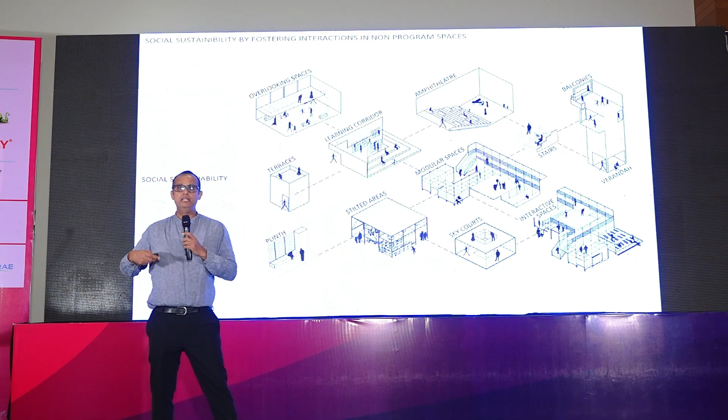So all of this understanding we were trying to build together, but we said that this whole gap, this idea of social sustainability, is so big, and who is going to pay for it? If you tell a client that there is something called social sustainability, he'll say, what does that mean? Let's put a recreational room or something. That's how they would get away with it. But we said, no, actually it is something that has to go through projects, across projects, to build this idea. So how do you actually make it happen in a project?

So you look at a brief, and in any brief that is given to you, about 20-25% would be what we call corridors or non-program spaces, like free-of-FAR spaces. So apart from the client's program spaces, you have non-program spaces. And we said this 25%, which amounts to a lot on big projects, becomes a part of your social sustainability use. So very clearly, any project would have a corridor. But if you turn this corridor into a learning corridor, adjacent to a classroom, it starts working like a corridor that you can use collaboratively.

So we started using every space; lobbies can become interactive spaces rather than serving only as lobbies. So you start taking every space in your building, whether it is a courtyard, a balcony, a terrace, or a deck, and start looking at it as a social space. So that became our endeavor through our practice. And that's how we started our journey actually.

And we were also building across India, and actually the projects I'm going to show you today all came out of competitions. And we consistently do competitions. We are also building different typologies of buildings, because we are building in different climates and different densities, because projects in rural areas are very different from urban areas. The densities are very different, scales of projects are very different. So we were trying to categorize them.

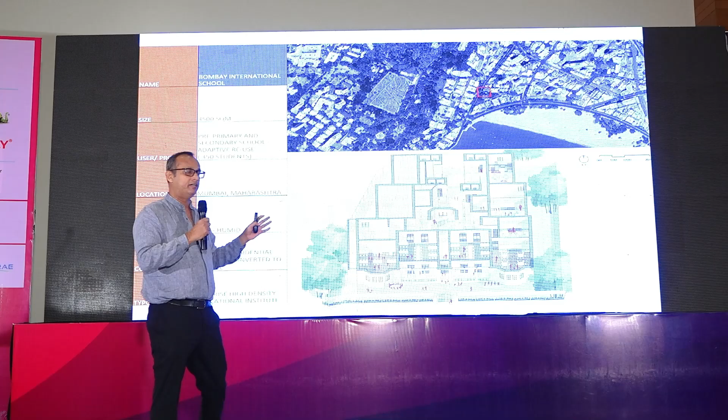So the first project I'm going to discuss today with this thread in mind, the idea of social sustainability, is this small campus. It's actually a retrofit building. And I need to show this because IIID is about interior design. So this is a retrofit and it's about interior design, so I start with this. It's a school called Bombay International School. This school started 50 years ago. There was no concept of international schools at that time.

But a bunch of artists, architects, even many actors came together in Mumbai and said that instead of education, we should focus on citizenship. We need to make good citizens rather than only people who are educated. And that journey took them to this idea of an international school. So it's the first international school in Mumbai, and it started out of a home.

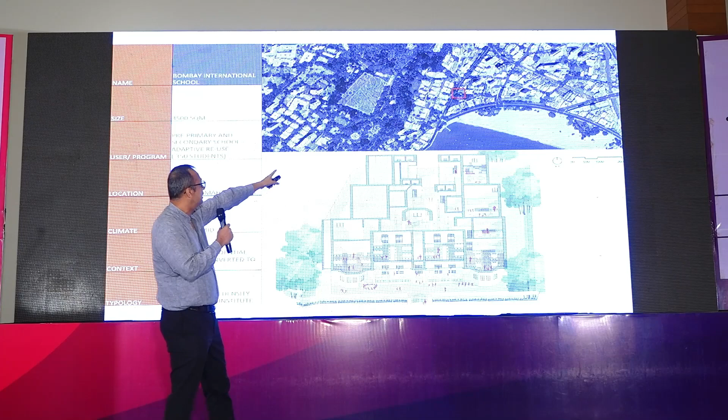It is actually a residential building in Mumbai, if you can see. That's Marine Drive, that's the Queen's Necklace, and that's the site. So it is very much around Marine Drive, and it was a residential building. So the story is that one classroom in the house became the whole house. One house led to the other house. Today they own that building with a few tenants.

Now they are the owners of the building or the school, but they have slowly bought out the entire school. So it's a heritage building that they bought out. So when we were called, it was a competition, and when we went and saw it, some of the spaces were very nicely designed, but every space was very differently designed. So we tried to find out, these spaces are nicely designed. They said yes, they're all designed by architects, but they are all different architects. So we said, how did this happen?

So the story goes that this is a parent-run cooperative school. That means the parents have to actually do service in the school. The parents run everything except educating. They don't teach. They run the food mess, they run everything. The mothers cook there, it's a lot of service. So the architects who are parents design the spaces. One architect has designed one space. So we said, oh, now we get the picture. Why do you want us? No, we want one architect to design everything now. Okay, so the competition starts.

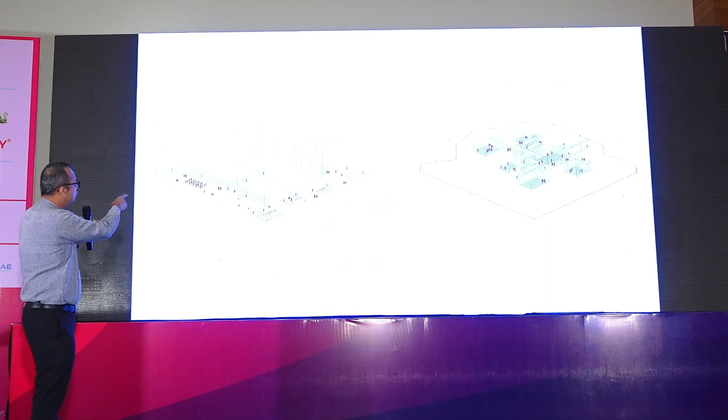So we started analyzing this building. And like I said, what was social about it? We were looking at the map of social footprint. It's a parent-run school. That's the parents outside, because they're always outside. There's no space for them inside the school. And we said, how do we increase the social footprint for parents as well as students? So that is the start of the concept. And then we started looking at spaces.

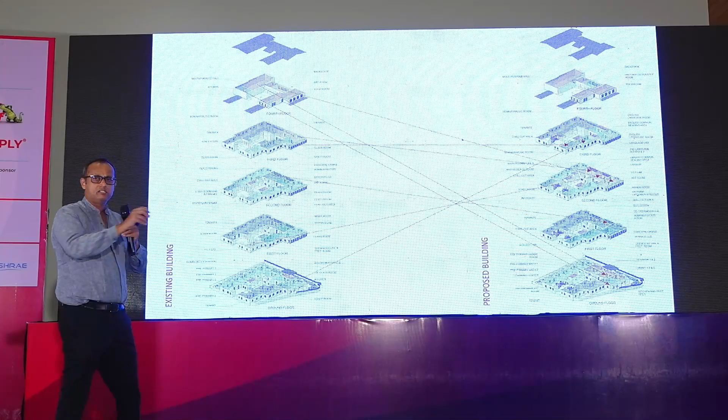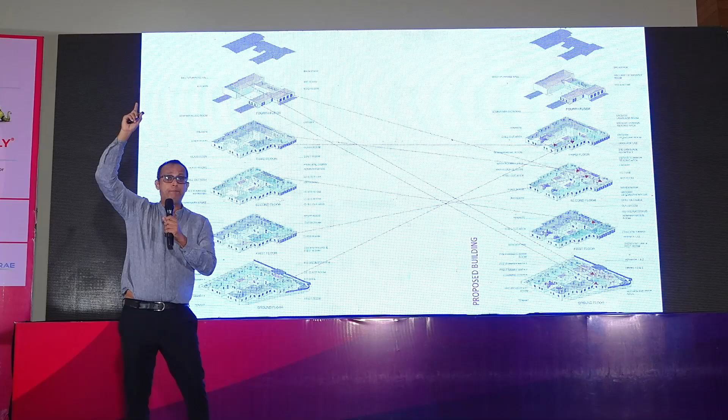All the spaces were very, very badly organized. I'll give you one instance. They have a kitchen on the ground floor, and the food is taken to the third floor. They don't have an elevator. The dal goes for 300 kids up the stairs. So this is double jeopardy. If the dal falls, the kids will get hurt, staff will get hurt. So we said, let's fix these problems. So we started fixing all these problems. And there comes the plan.

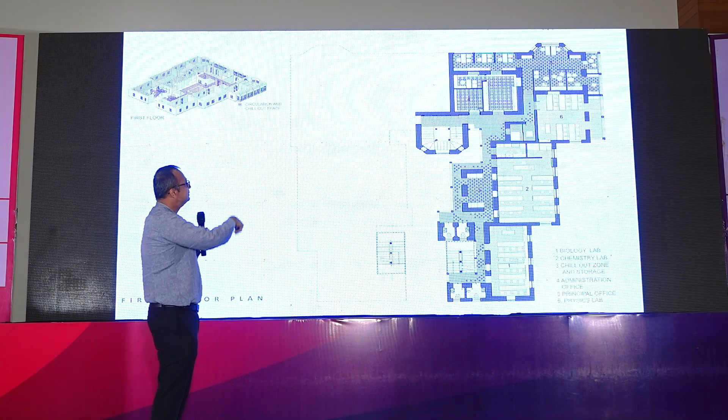And the pre-primary is here. This part of the building is owned by somebody else right now, but of course it's already taken over. Here you can see that the labs are here. So conceptually we said that instead of having classrooms, let's call them subject rooms. That means you can create immersive environments. A teacher doesn't have to go class to class, but the students go from class to class. So you give a geography person a chance to create an environment of geography or history. So the classrooms become immersive subject rooms rather than classrooms.

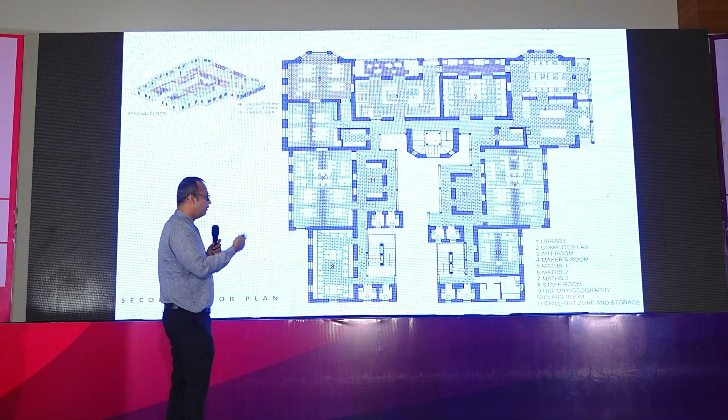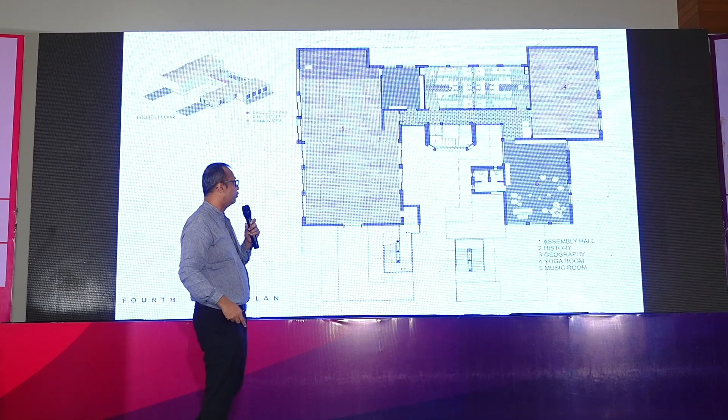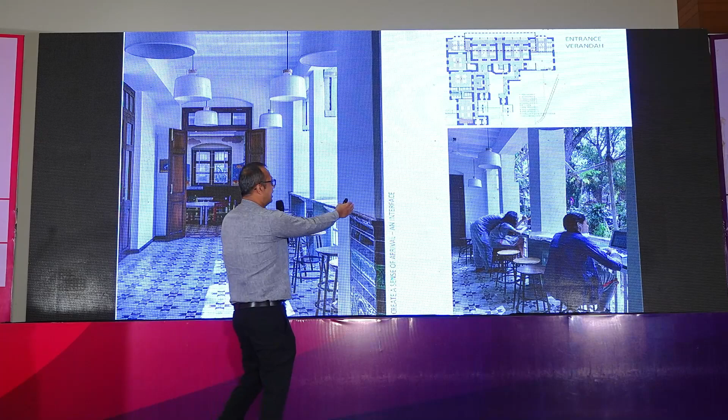And that's after we finished the project. In Mumbai, space is a constraint. So these verandas on the ground floor were taken up by the school. And we said we have to open it up, because actually the veranda is the air conditioner of a building. It allows the western sun to shade. It allows the building to breathe. So we opened it up, and now we see students using those spaces very positively, rather than just putting glass on the outside. So this is that dining area on the lower floor, where parents also use it for their meetings. The parents are very happy.

Otherwise, they were outside that veranda sitting, you know. So you can see jack arches in this building. So we did very little actually. We just had to clean up the old flooring. The floorings that were damaged, we had to create a new pattern. And we had to simply design lighting actually.

That was the biggest challenge. Otherwise, everything was keeping the wood the way it was. I mean, sometimes the architect's role is very simple. You don't have to do much. And that's what you realize, you know.

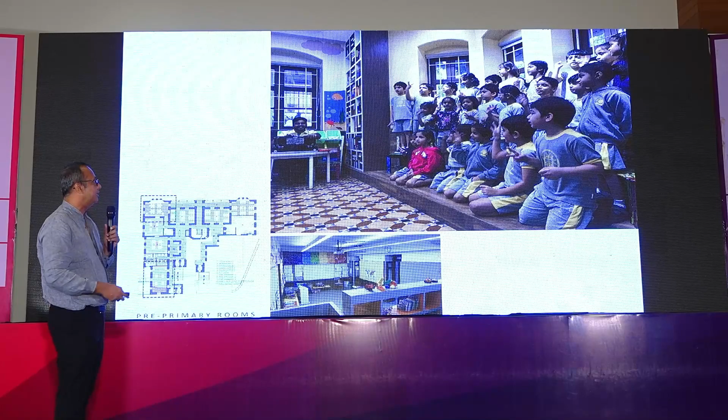So this is the pre-primary section, which is the language and drama room for them. So we created a small stage, you know, for them at their scale. And that's how they use it; you can see them singing all on that one little stage.

And this is one of their reading and play areas. So we created a play area where they actually can go and discover a book. They find their book. I don't think we'll fit into it, but those kids really go up and find their book and they find a place to sit and read also.

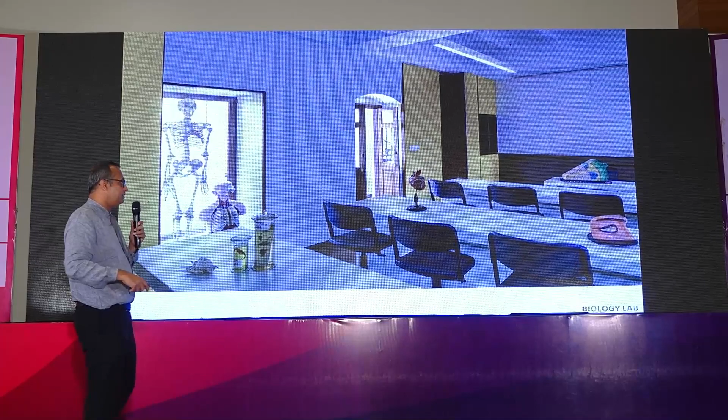So this is the biology space, and even the skeleton, we realized, had a name. So we said, let's put this skeleton in the window, because everybody knew his name. We didn't know. The skeleton had a name. So we just put him in the window of the corridor so everybody can see him. And that's the art space. We said, okay, it should have more lights. So on the corner,

And just to give you an idea, our earlier CM, now the deputy CM, could not get his kids into this school. So it's that elite school, and that's only because he can't give time to do service. That's why. There's no other reason he could not get his kids in.

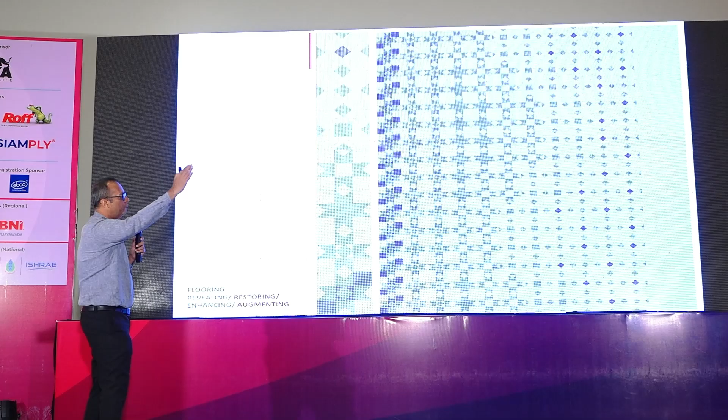And the challenge was there were 19 types of flooring because it was a residential building, right? So we had to create a pattern of our own. So we extrapolated out of the geometry a pattern that evolved into the flooring across the entire space. So from the window side, you have a lighter flooring that comes in the center and becomes darker, so that when the space brings in light, it bounces off and you get more light in the space.

So evolving the flooring was an extensive process. It's looking very seamless here, but I kid you not, in the office it was a very extensive process of geometry and iterations, and I don't think we used any AI 5 years ago to make this happen. Kids were doing it by drafting, so it was not AI.

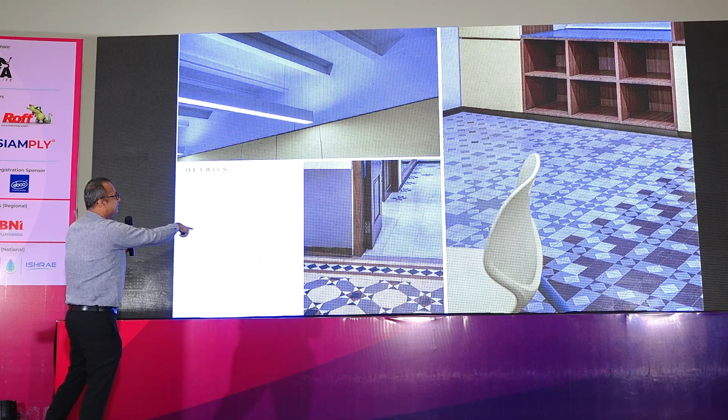So those are the details that you see, the old flooring with our new floorings there and there. And simply, you can see the joists over there, and the light that we've designed is a simple bar. Actually, there's nothing we've done. Just suspend the bar, and the light is thrown to the roof to show the roof, as well as give light to the tables.

But actually, on the contrary, what happened was the brief. It was a design competition, where in the first stage, when we read the brief, we started modeling it, and we started realizing that 500,000 square feet on 7 acres was very tough. Some of our buildings were going to 8 and 10 floors. So we said, this is a lot of height for an urban campus, a residential campus. So we should bring it down.

So when we looked closely at the brief, we saw that all the student residential rooms were all single rooms. When we studied architecture, when you leave home, we stayed in twin rooms with our friends, and we made a new family, right? And we said, this is the idea of how you bring the social milieu, where you make new friends, but you need a room partner.

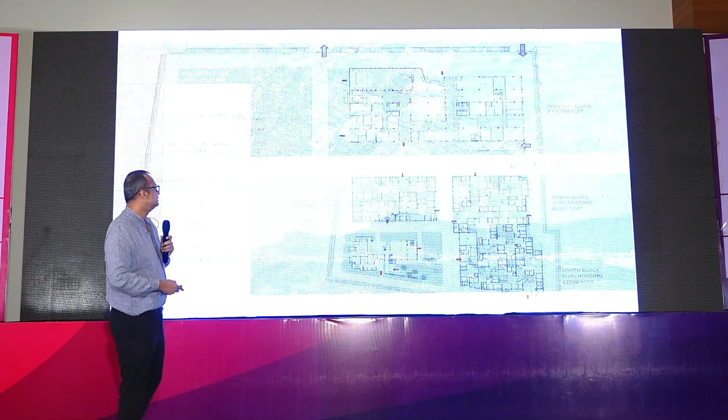If you visit the deep plan building on top, there is the institute. And when you are building at 2 FAR, it is not very easy. If you want to build tall, it is easy. But if you want to build low, it is very tough, because you want light and ventilation in every small room. So there were strategies. In a deep plan building like the institute, we were doing large pockets of light, like a Swiss cheese box with spaces that give you ventilation from the top and the side.

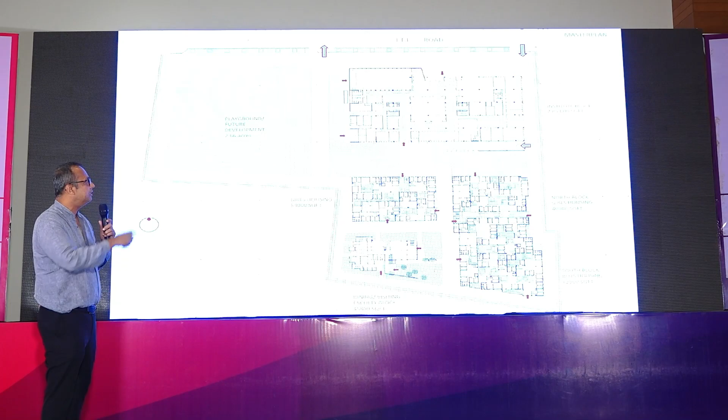Similar ideas for the residential, which is this L-shaped building. Two separate buildings. That's the girls, this is the boys. I think that has changed because the girl percentages have gone up in the school. And that's the dining hall down there with the visiting faculty room. So that's the plan, and we wanted to leave the playground free. Initially they didn't have the land, and we still wanted to respect that. So that's the master plan, I would say, of the 500,000 square feet.

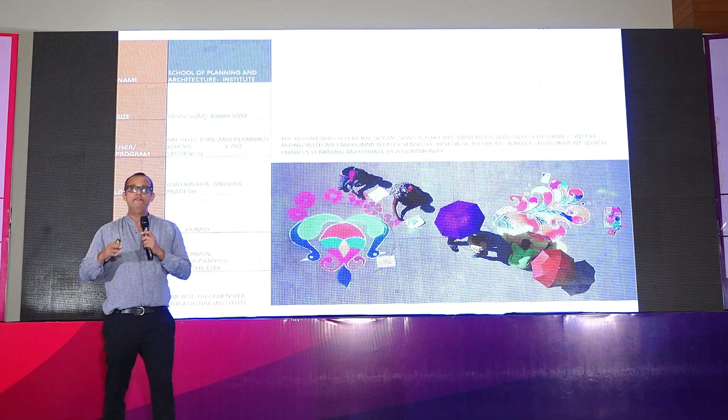This is a picture that we chanced upon, and I thought this is very relevant to us. The intent was to create social spaces that are embedded within the cultural context, along with an environmentally sensitive response, to create a built environment which enables learning and living as a community. And I think this is very important, that if you cannot express yourself in a campus, it becomes very restricting.

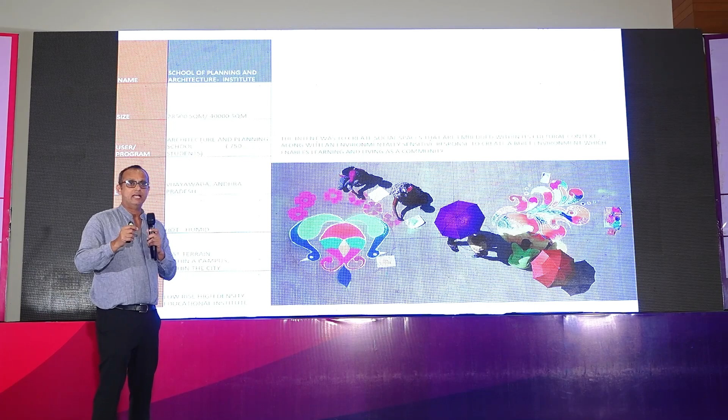So what was actually interesting about this is that you see children doing rangoli, but the most important thing is the shadows of the umbrella. That means even if it is very hot, which you know Vijayawada is what we call Blazivada, still the umbrella works. So we said, this idea of umbrella is fantastic. So when we were looking at the institute block, we said it's a massive building. We'll put a massive umbrella like a parasol on top of it and start.

And then we said, why can't the building itself become a parasol? So we took up 2 floors of the building and made it into the parasol that gives you shade. Then we added structure and textures, and porosity to the building.

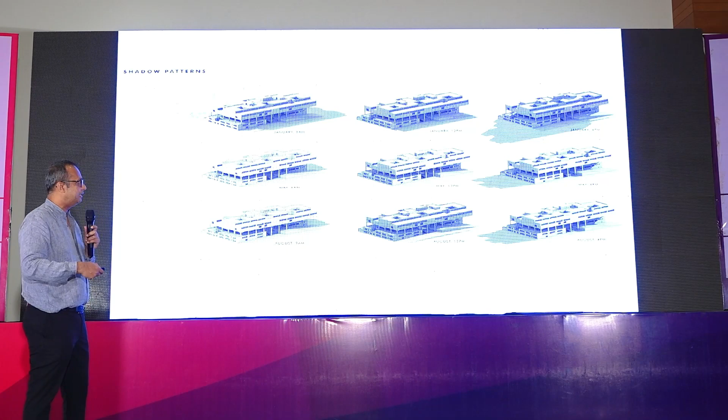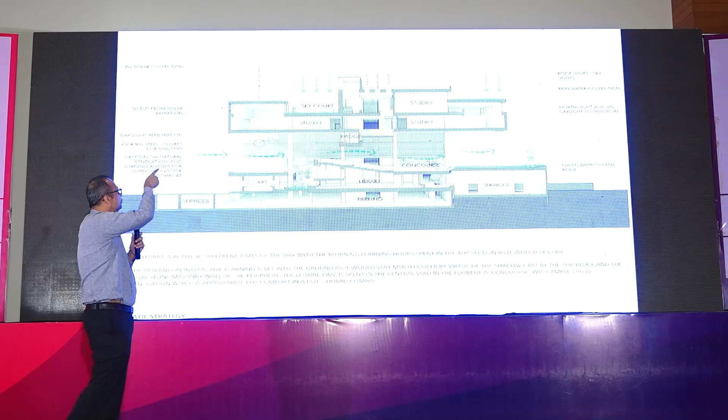We also tested it for the shadows in the day, in the night, and the year, and which are the spaces that you could use in these shadows of the building. Conceptually, in Vijayawada, hot, humid, you need the winds to go through, so you need that cross ventilation for the southern side. You need north light, so the building folds up, so you see only north light. And if it's a deep plan space, you need light to come from the top through a double height space to send light deeper into the space.

So how you actually sculpt the building form, and the lower part of the building is embedded in the ground. So there is actually a lot of thermal mass with shadow on top. So it becomes a very clever strategy environmentally to keep your building cooler at the lower levels. And also in terms of a strategy, how you use your program in the day when the box is still colder, you do your morning programs on top, and then you move to the workshops and the lower areas where it is still cooler.

So the many strategies, the architectural academic zoning I've explained over there. And there are elements of architecture, which is the roof, which is a sculpted form. There is a pavilion in between. There is a plinth that is folded. And the formal strategy of flotation on top, the urbanscape in between, and embeddedness in the lower part. So these were the conceptual ideas we developed in the competition time. And we tried pretty much to do the same thing. It's not that it's changed. That's just the abstract ideas.

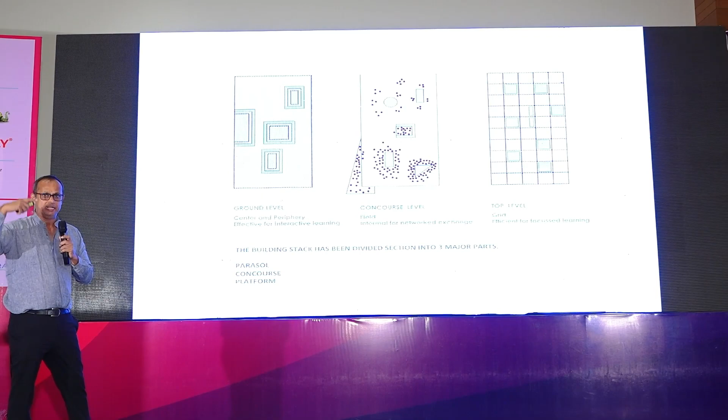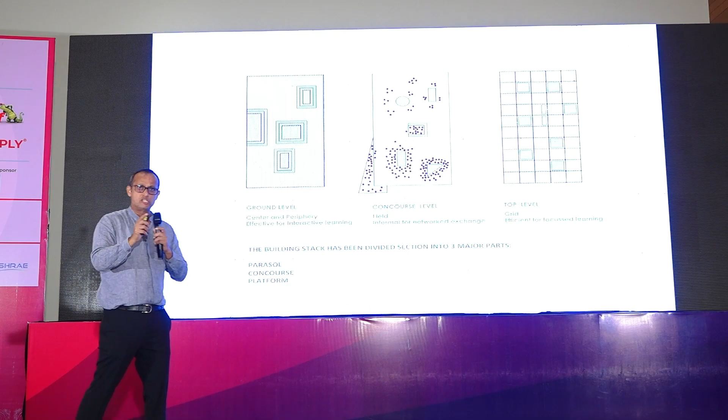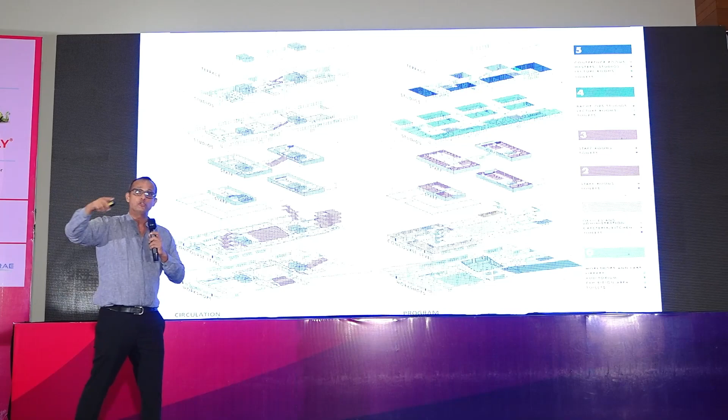So in effect, the program that you see below is all the workshops. The concourse level has only the administration area, and the rest of it is like a stilt. So if you go there, there's a canteen on the western side. It's all open. It's very welcoming, actually. Cool winds move through that space. Faculty rooms are the next 2 floors, which are very lean boxes. And the top floors are the parasol, which is the studios and the lecture halls. So conceptually, it is very simple.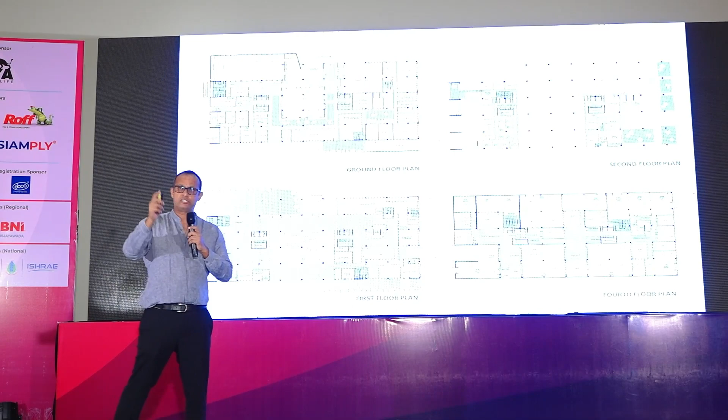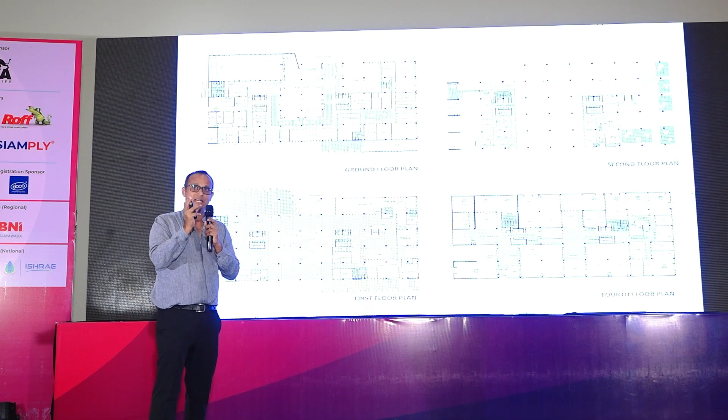Ground floor has the heavier program, like the books, that's the library right in the center. And somewhere we do believe the library still should be the center of attraction. And people circumambulate it like a temple, you can say. But in a sense that it's a building within a building. The library is a building, but there's a larger building. So it's a building within a building.

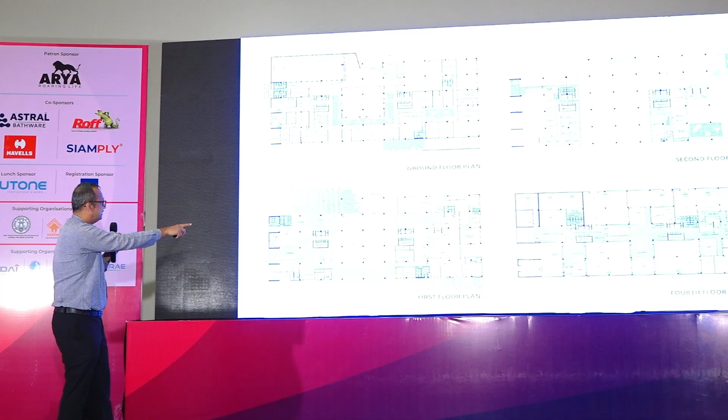And then you can see on the first floor, the concourse level where there's only administration on that side and this is open. And there are two main cores to the building with the elevators you can see going across the building where all the ducts go. So some people always ask us, where are the services in this building? But they are all actually within this area. All the services are crammed in there and they go up and down and go horizontally. So it's a very simple strategy of putting your services in and moving them horizontally.

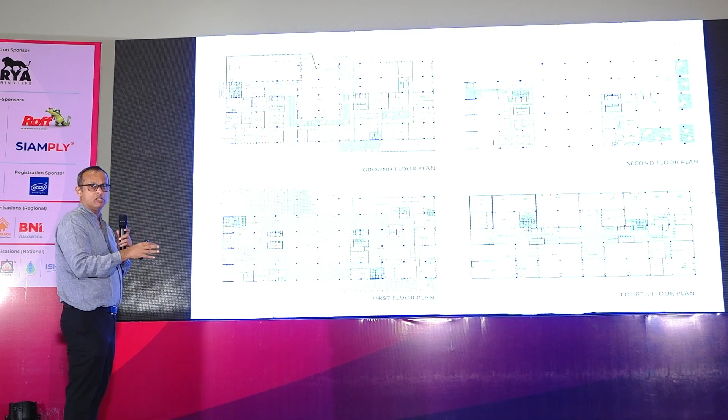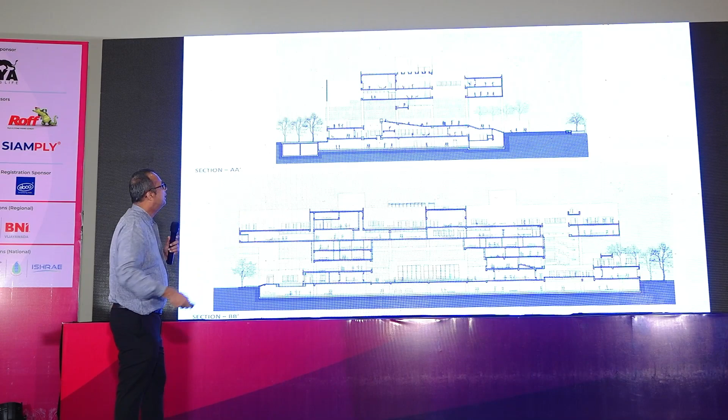And then when you go to the top floor, you can see the studio spaces which are double height and single height. So in section, what you see is that we are creating this whole idea of a deep gateway. So when you go in, you feel very welcomed. And in the other section, you see the street level is slowly being brought into the building. So it's like a streetscape slowly becoming the urbanscape of the building itself. There's a lot of talk about the urbanscape, but nobody talks about the social scape of a building. And I think that is very important, how you connect these two.

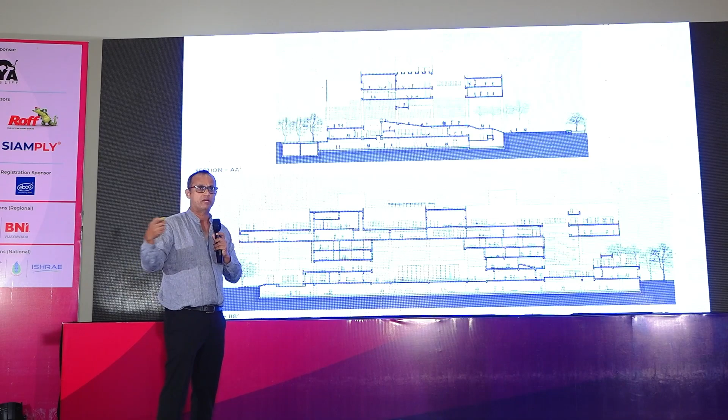So the building sections varied at every 10-meter grid. So we said, if I have to cut a section, how is the section here versus how is the section here? So we made a model that you could move. It's very easy to do it in SketchUp. You just move the section line and it gives you a section.

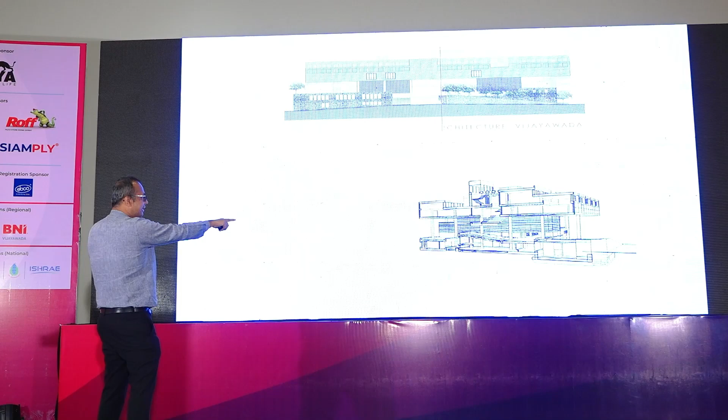So you can see the ground plane starting there, coming into the entrance, the raking of the library roof, which becomes the GBM area. Then that comes towards the eastern side. It comes to a double helix staircase in the administrative block. Yeah, that's the double helix staircase. And it comes to the eastern garden. So on the western side, what you see is a building that projects out to create shadow. On the eastern side, the building is pulled out to create gardens on this side. This is the eastern side.

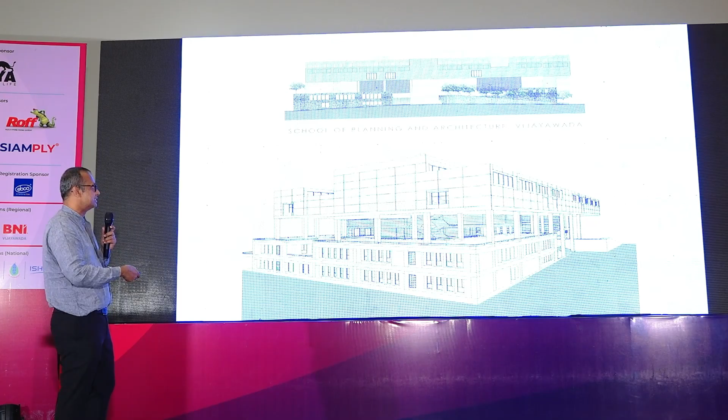So that's the building from the western side, where you see these shadows that are created. And it's also, in a way, a spectatorship: how these deep balconies become viewership for the basketball court and the games area that is on that side.

And to add to it, our auditorium is here, embedded in. The auditorium is an air-conditioned space, so the more you put it below the ground, the temperature differential is as good as nothing. So you don't have much heat load on it, and it's on the northern side, which is shadowed by the building itself. It is a green roof, so people can use it as an OAT. And people have.

So simple things, I myself have never spoken about it, is that this element, people would never know what that element is. Actually, it is the basement ventilation. If Richard Rogers or Norman Foster would do it, they would be pipes. But if you have to do it in India, you would do it differently, and you have to do it this way.

I think we spent a lot of time on that, the casting of the block. Srinivas, we remember, there were iterations and iterations for this one block, its sizing and its weight. So when we present the building, it comes through very smooth and easy, but actually there were a lot of iterations with the client, involvement, how to get it done, how does it look, and to create it.

Even this Tandur stone, we went to Tandur. We were building with a government agency, CPWD, and there was like, who uses Tandur stone here? I said, this is the best place to get Tandur stone. So there was a lot of that kind of involvement from everybody to achieve what we achieved.

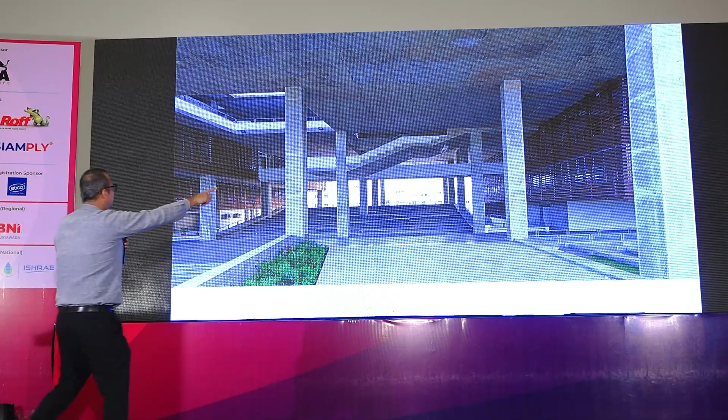I don't know which one is which side now, I've forgotten. That is planning, and this is architecture. These are faculty spaces and the studios are on top.

So this is, again, never lose sight of the connections with the city itself. That was very important, that when you go around these staircases you see the city and the hills. And the idea of this transparency, that although you're a 5-story building, it never feels like a 5-story building, because you're actually communicating across floors. The voids allow you to communicate across the floors.

For instance, when we won the competition, we were very short of staircases. So we did a design competition in the office, and one kid came up with this idea that we can have a double helix, a DNA structure. What it actually does is, on a single plan, you have 2 staircases. So you double capacity by having 2 staircases on the same plan.

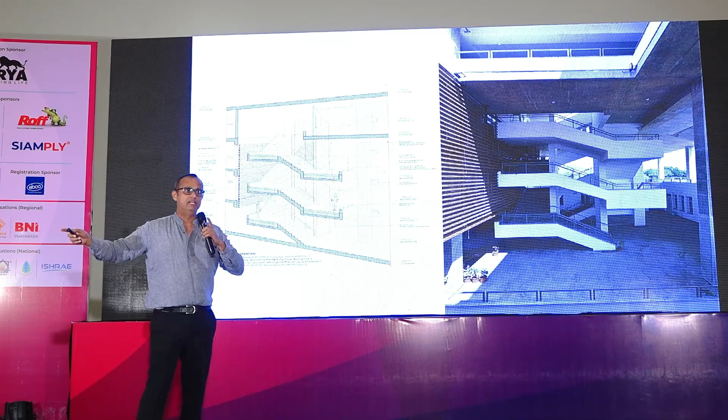This is a tricky one, because if you have staircases that are very wide, they really feel disproportionate. So you have a smaller staircase, but 2 in the same plan. You will actually go in these staircases and never meet the other guy, but it reaches the same floors. But do visit it, because it's an interesting, fun staircase.

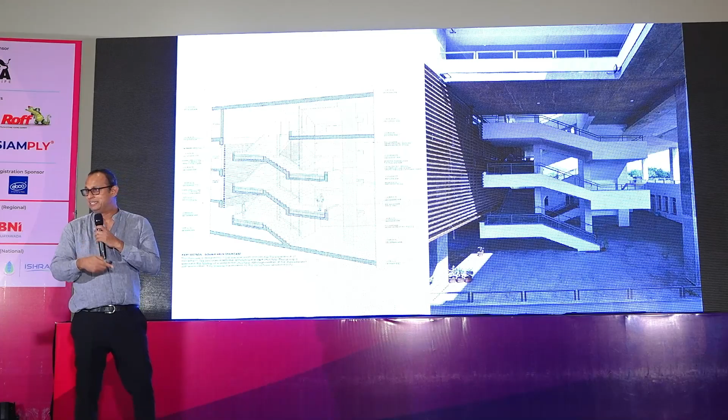So yeah, those are some of the spaces where the skylights come in, and we'll talk about these things called the learning corridors. I talked about this whole idea of how to use corridor spaces effectively. In architecture schools, what tends to happen is we have a lot of juries, right? And juries don't have spaces because we tend to move all our models, our tables. So we said, why can't you have juries across these corridors?

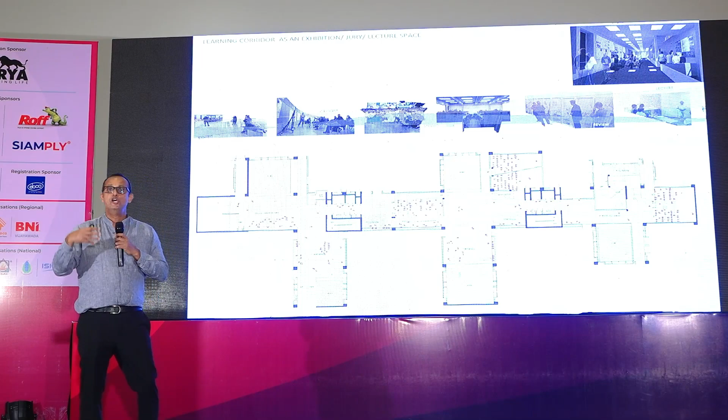So everybody's work is presented outside. So people who are from the lower years see the upper years' work, and vice versa. So it becomes like a learning corridor rather than just a circulation space. So this is like a 10 meter by 100 meter corridor that we sort of worked with.

Yeah, those are the photographs of that space. The voids, the studios, the double height, and from the side on the south side. So it's a box because you don't want much light going into classrooms and studios, overlooking from the ground into the sky. And that's at twilight on the western side. That's from the other side of the road. This is just after sunset.

So the lighting up of the building, if you've seen, there are no lights in the ceiling. It's all underlit. So it's very simple. There's no lighting designer here. You take big, large lights and underlight the whole sort of concrete box.

And one of the faculty members made a calendar at that time, interesting how students were using the space, and that's that sketch, and how they use that space, that general body meeting space. And this is some of their programs. I think this was a Republic Day.

Prashanti, you're taking a photograph, I can see. There, right there. First row.

And this is the residential part. So we are talking about living now. Campuses are about learning, but we move on to living also. And living is a very important part where, in living, the issue with the social milieu is social control. And I think we were having a large discussion yesterday on how difficult it becomes to control. But the idea is to liberate.

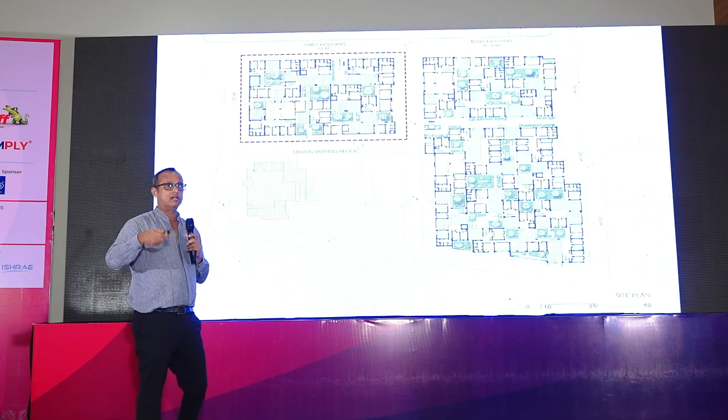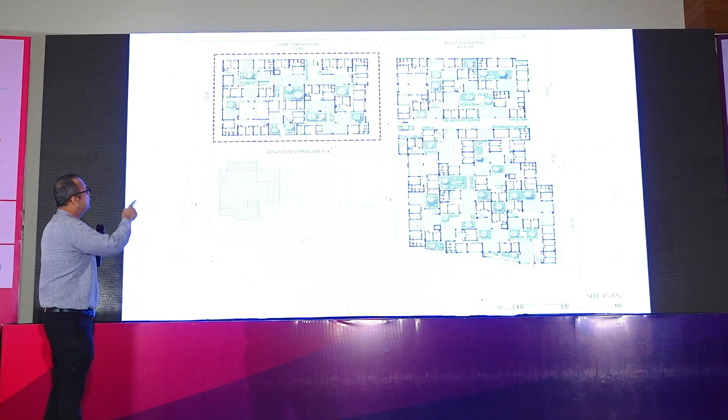And I think that is what we've been working on in all our campuses, where we say that we should not be controlled. Like the idea of the diagram of the panopticon, where you are controlled by the authorities, should reduce. And that was the idea behind this whole, so that you don't have linear corridors that control you. So here's the girls and boys, but this has changed now.

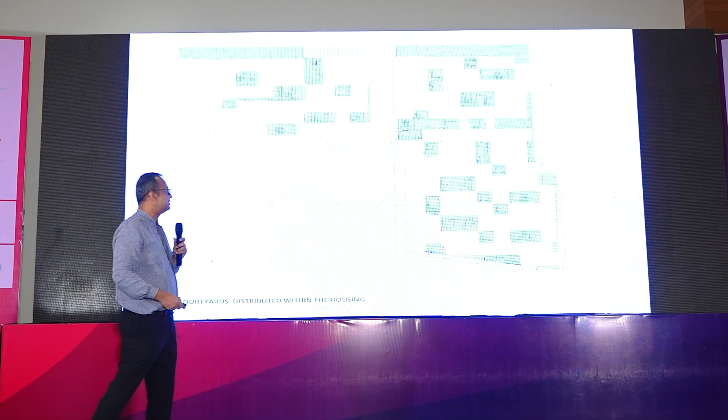So what we were doing actually is, we started with embedding 25 courtyards across the spaces, and conceptually we were working with the same idea of lower areas having porous spaces where winds go through the courtyards and pick up the hot air and move out. On the tops, you can see there are terraces. So the lower spaces are more like day spaces that keep you cool in the shadow, and the evening spaces are the terraces above, which fold up there.

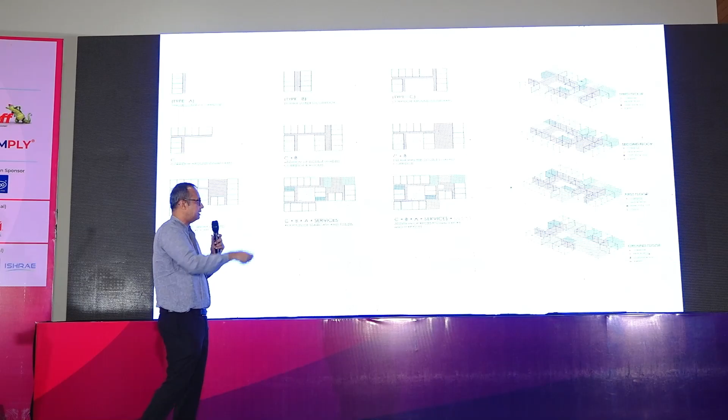So the whole idea of social sustainability and how we were looking at circulation, typologically it is very simple. There are single loaded corridors, there are double loaded corridors, they are all in a formation of a C. Sometimes they all come together as different combinations to create this. That's the typology. Just an animation will give you an idea how we evolved it. Create the voids first.

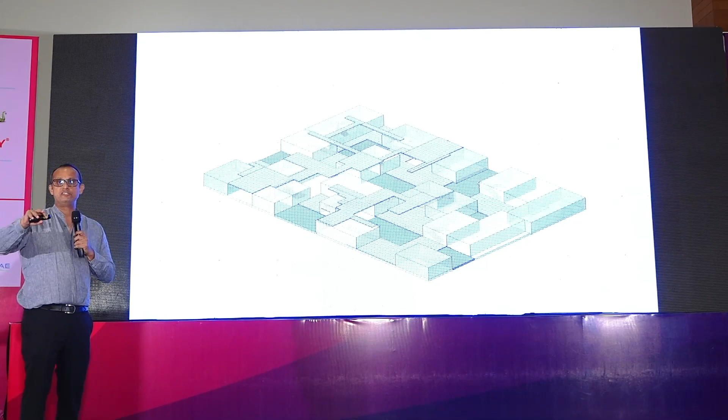Then the voids are connected with these gardens and stilts that connect all the voids. There's vertical circulation. We all know these formulas, right? 20 meters, you have to have a staircase, make a radius, create staircases, connect it horizontally, and that creates the entire morphology around the small courtyards that we created. Yeah. So you will see these blocks, the different types.

So each of these blocks has a different DNA. There are 3 types of blocks that have been used. Type A, which has a stilt deck and a terrace. One has the staircase in it with rooms. The other has the toilets with the rooms. Yeah, so that's the breakup of the rooms, stilt, deck, terrace. So you have all these social elements like terraces and decks embedded within the block.

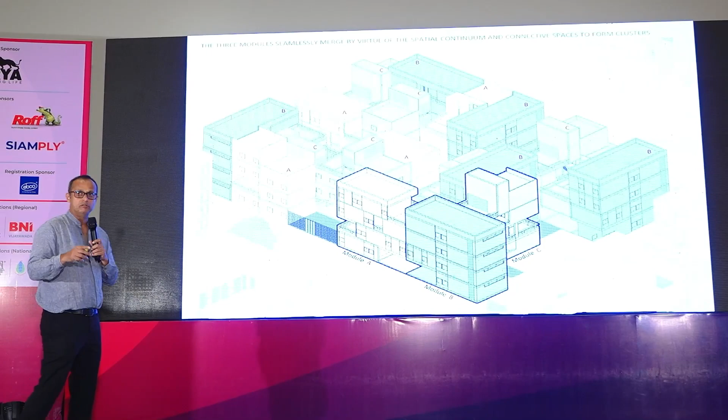And when you actually look at it, it comes together. Yeah, that's the module actually, A, B, and C. And it comes together like that. Now, if you ask me also, I don't know which one is A, which one is B, which one is C. I will not be able to tell you if I go there. Only this drawing is telling me because it's labelled as A, B, and C.

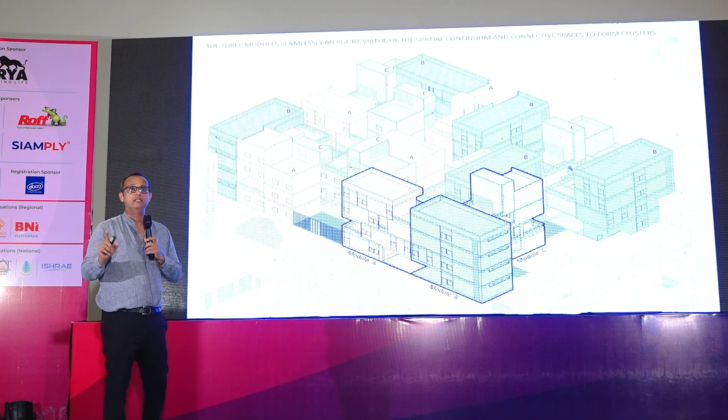So what this actually does is, I can take this block and create iterations over iterations with different plans. So there are about 15,000 options. No AI again, so it's not done with AI. It's done with some normal idea of modularity. But we are using modularity to create non-standard design. It is not using modularity to create standard design, but it creates non-standard design.

Because you see, when you talk about modularity, that's the problem with modernism, right? They create standardization and they make it like an assembly line where there is no variation, so we are all like machines. So this opposes that whole logic.

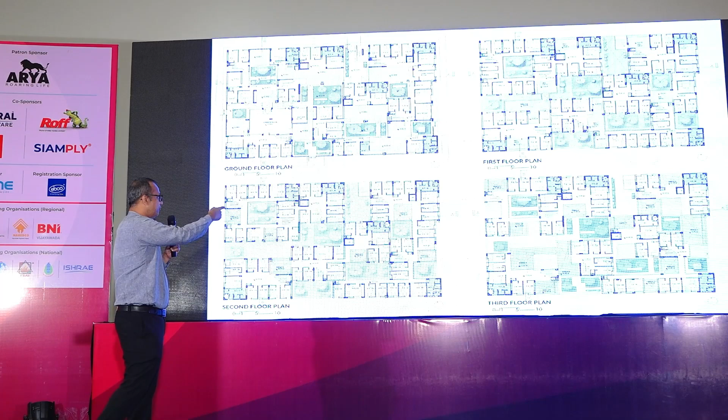So actually, these courtyards have, let's say, 25 courtyards, 400 elevations of them. Each of the elevation faces are different. Not one of them has the same elevation. So that's what this kind of a non-standardization idea creates. All of them look different.

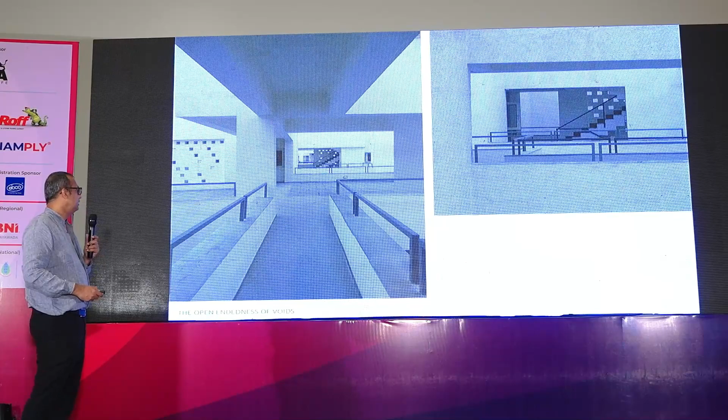Yeah, so there's some stairs on the terraces and endlessness of these voids that are there and the connection to the sky. That's more or less the entire campus. That's how it sits in the landscape. So the idea was not to go very tall, and we tried to manage that for the student living.

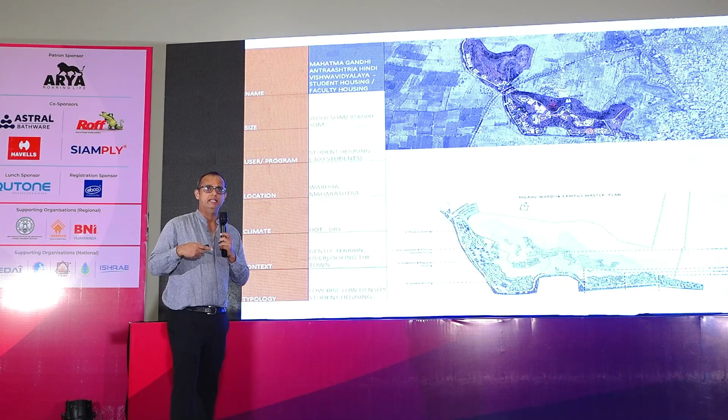So this is a campus, the first competition we did 20 years ago. Again, similar ideas of living, where we were questioning. It's called the Mahatma Gandhi Antarashtriya Hindi Vishwavidyalaya. It's a postgraduate university, and when the brief comes to you, you wonder: there is a language school, the students will stay, the first year will stay, the girls will stay, the boys will stay. And we said, why don't we create a village-like community for these adults? They're adults, they're all post-professional, living together. So we wanted to create a village.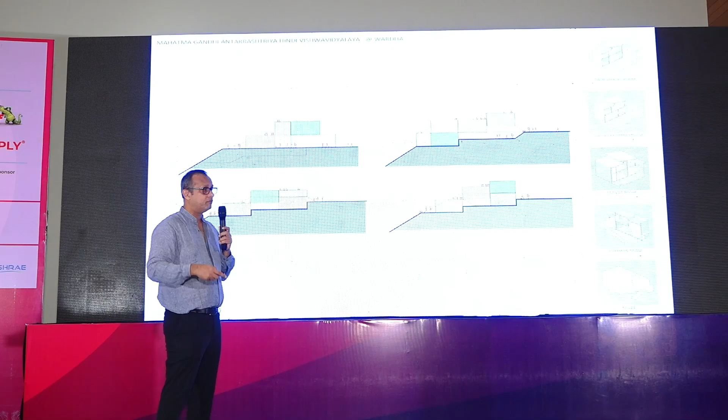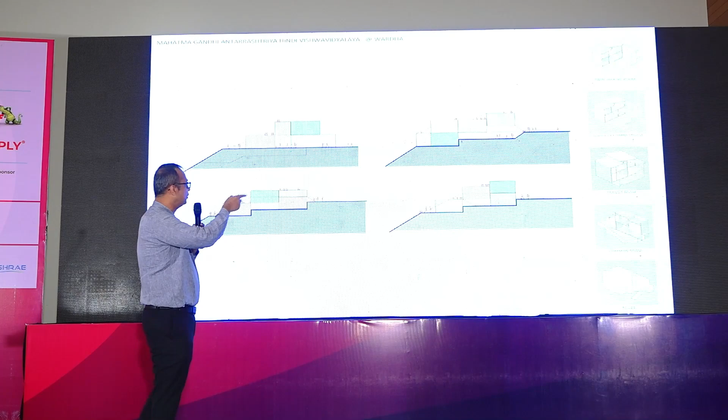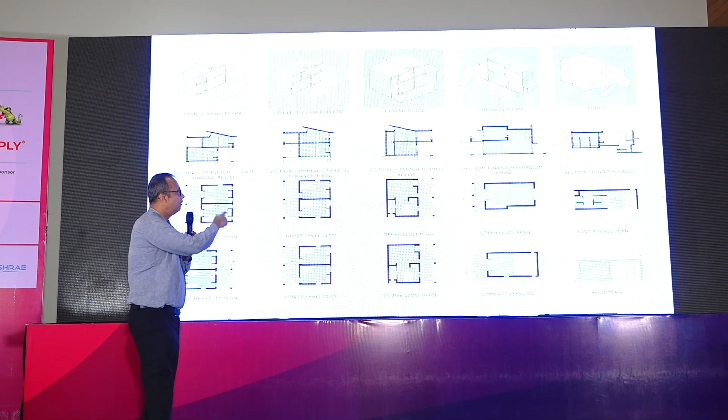So we took the single room, the twin room, the transit scholars, the common rooms that we added, and the toilets, and made it like a village community. And we put them as standard blocks to create non-standard design. These are the standard blocks with deep corridors, so you can use them, and made different permutations and combinations. All we did was add a common room, where people can come and cook and recreate. It is a sloping site, so we put it together on the site. That's the kind of striated program, you can see the common room dotted around. So that's where the community comes together.

So that's the section. It's a rural area, so it's a low-rise, low-density kind of format. And it was built at 650 rupees a square foot 20 years ago. It's simple. It's load-bearing walls. When you have a hot, dry climate, you don't need too much opening aperture. So you start reducing the opening, then you start realizing, why do I need columns? So you eliminate the columns and you bring down the cost of the building by doing load-bearing construction.

Again, these are the paths that lead you to the common room, because everybody is trying to go to the common rooms from different areas. It's like a village kind of a settlement that you move through in the landscape. So again, this also was a project.

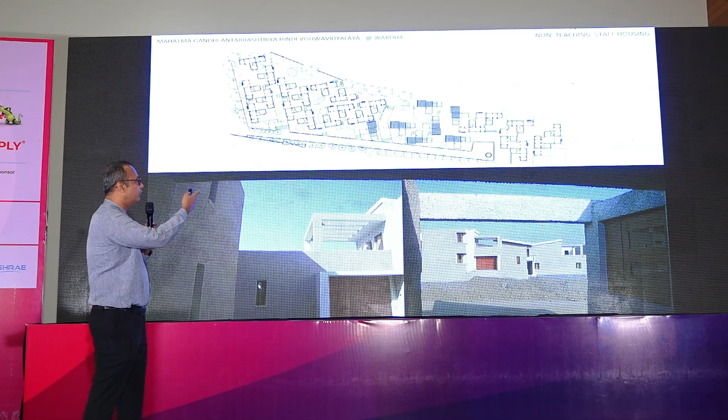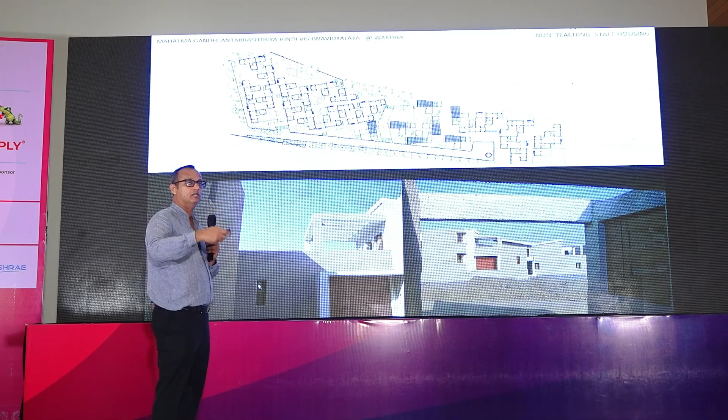And this is for the non-teaching staff. It's very unfair actually, what happens to the non-teaching staff. In government, they are very ruthless. The family size will be the same or more for non-teaching staff, but they get a smaller house. So we said we will give a house extension in the form of a stilt or a terrace, in an interlocking manner in courtyards, with a butterfly roof, so they get this stilt and terrace you can see there. One gets a terrace, one gets a stilt, and that's how they come up to their terrace.

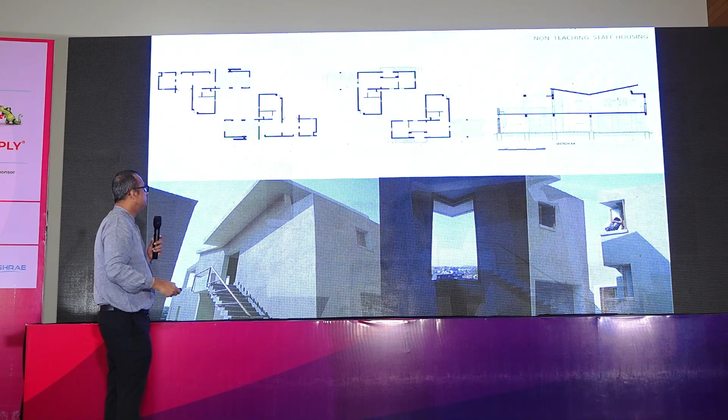For the lecturers, we had a split-type unit with a row house situation. For the professors, we had a bungalow type, and that's for the vice chancellor.

So I was called for a lecture to Nagpur, and I said, I want to go and see the campus. And to my surprise, after the trees had grown, this is the lecturers' housing. It still exists after 20 years. It still feels like a relevant housing project. People are happy living there also. And I hope even SPA Vijayawada gets faculty housing. That was the plan.

I think this is the last project about living. So in a campus in Mumbai, it's called the VJTI. It's a premier engineering institute. And they have a 16-acre campus, and they came out with 2 competitions, one for a master plan and one for buildings. So we won the master plan.

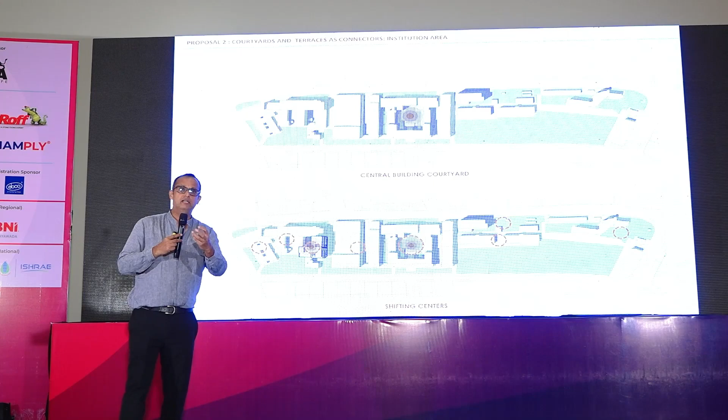So this is actually a 150-year-old British-built building in the center. And over time, there were buildings developed around it. And over time, what tends to happen is the center starts shifting. And that's evident, right? When you start developing a campus, the center will shift. So we realized that these centers were getting fragmented.

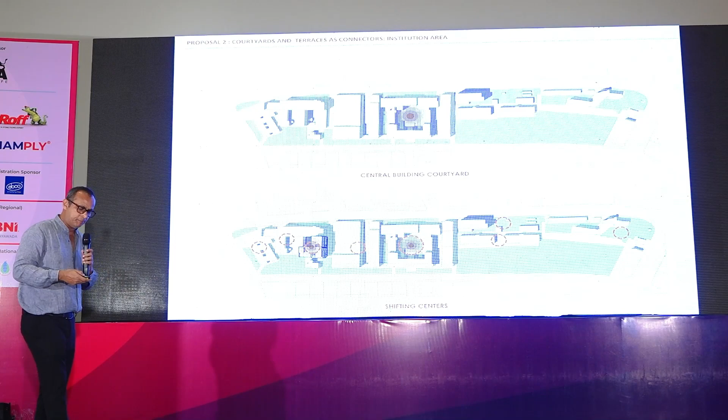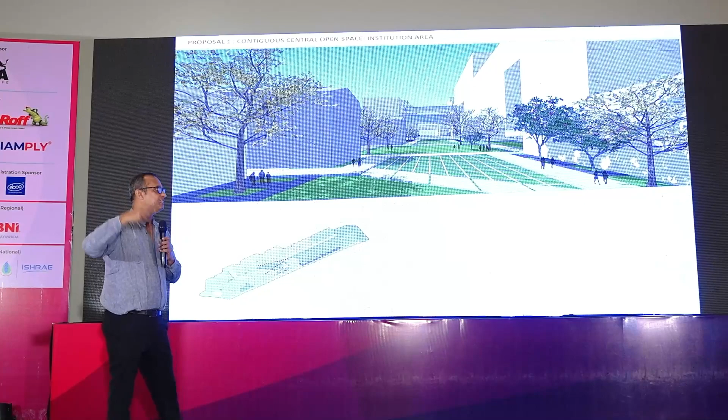They were not connected. So in the master plan, we developed a strategy of how to allow for this to seamlessly connect. The densities will always go higher and higher. The need for FAR is there. They have 4 FAR. But how do you connect these centers, make them contiguous? So we won the master plan. And then we won another competition for a building.

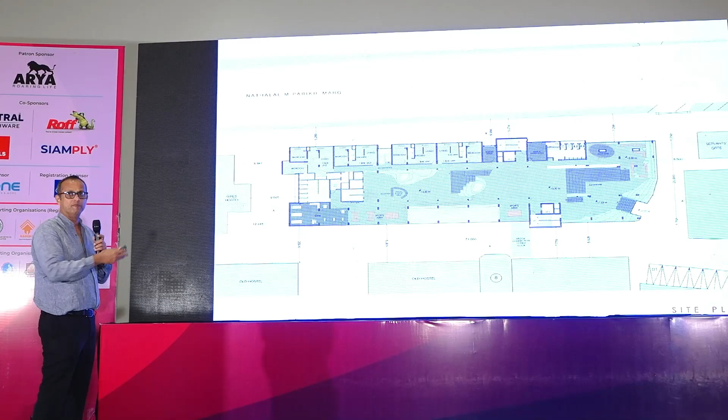This is a postgraduate hostel in the same campus. It's next to the Maidan. So if I go back to that plan, that's where this building I'm talking about is, and that's the Maidan. So we were looking at making this kind of building connected to the Maidan with these decks. So the ground floor is a deep plan dining area, and the kitchens, everything is there, but then the podium is free, so you kind of seamlessly go onto the podium.

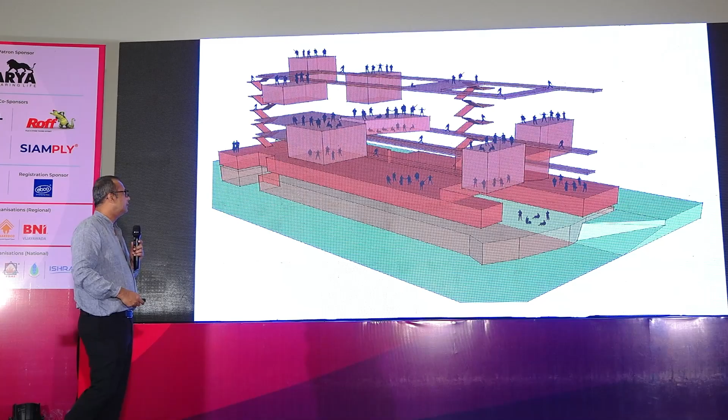And then, again coming back to the idea of social sustainability. I talked about social control, but what I didn't talk about is social equity. Now social equity is very important. What tends to happen in a dense tall building, Bombay FAR is high, right? We go tall, we have no choice. So in the common program, people tend to put the amenities on the ground floor, first floor, and finish it off.

So what tends to happen is people living on the 6th and 7th floor say that they are not connected to the ground. They feel isolated. And of course, you've heard a lot of stories with this isolation, people tend to get alienated, and it also leads to psychological problems. So we said that there has to be social distribution.

So in this project also, they let us develop the brief ourselves. They gave us only room numbers. They said, give us maximum rooms and your program. So we developed everything from a gym, recreational area. We developed even a clinic room for a consultant to come for healthcare, a coffee shop, name it. There's a reading room, a lecture room, a computer room, a pantry, there's everything across the building, and that's how we distributed it. So the idea of social spaces and social equity was important.

And that's a section of the building. These are architectural drawings, and when we develop them, it's not only about providing the facilities, it's also the idea of connecting program to these facilities. So legibility is important and accessibility is important. Without these things, programs don't work, right? And then you dissolve the idea of the panopticon through that.

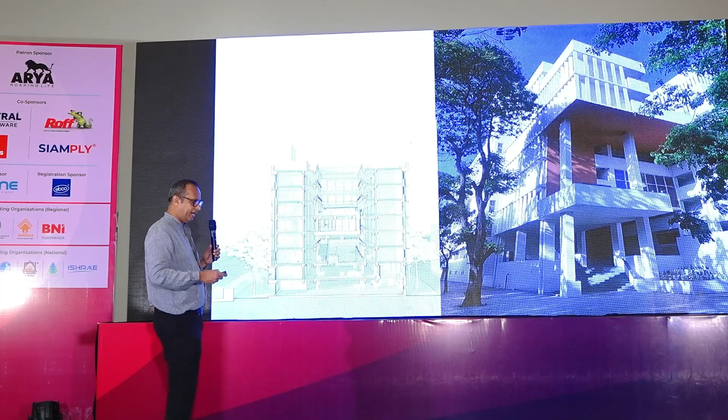So that was the rendering when we won the competition. Again, it's an east and west building. So it's a no-brainer that this building was cooking up. So we had to design an idea of a fin. It's a very simple board kind of fin that we developed. And the television room is there, suspended where you go below. That's the building. It just got completed. We got occupation. Furniture is not done, but we've just finished the building and it's ready to occupy.

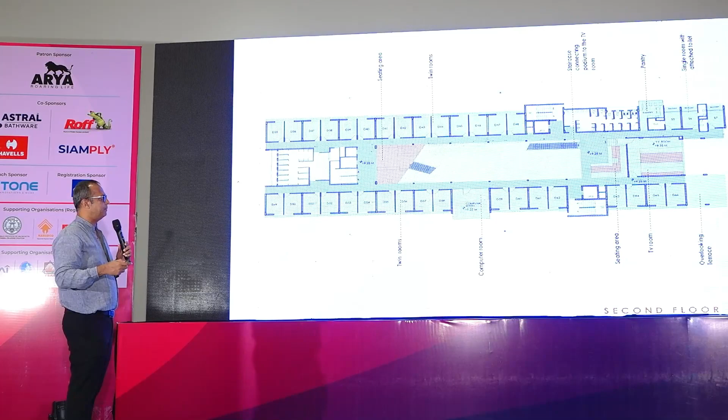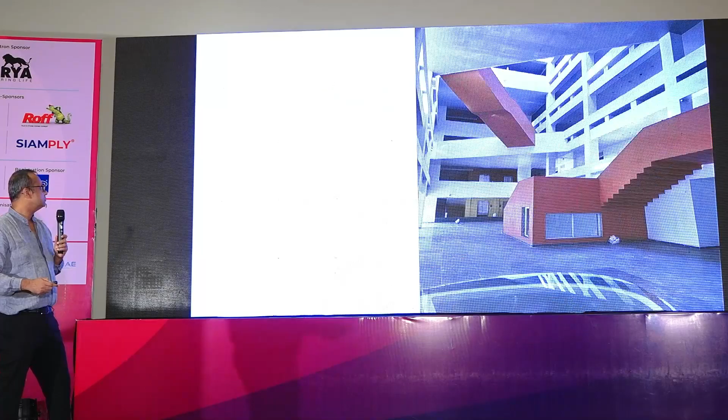So the staircase leading to the TV space. So we said the accessible spaces, the red fire escape, should get highlighted. That's the computer room there. Yeah, so more or less that's the project from the inside.